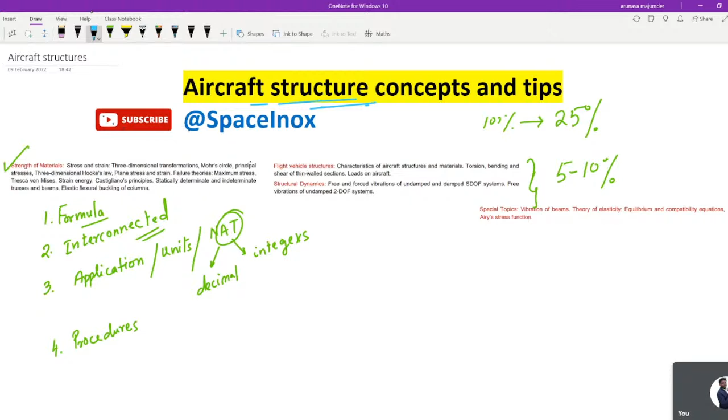There are certain rules and regulations for solving certain things, so if you know the procedure, it's going to be easy for you to solve. It's definitely one of the very scoring subjects, and you can avoid some negative marks because of this. Remember, when it comes to the GATE exam, the questions are obviously going to be complicated, so without wasting much time, let's focus on the particular topic.

As I've said, strength of material is one of the very, very important things. Now, what are the possible questions and how you can plan your study for your last moment preparations? What are the important topics you can't miss at all? So first, I'm going to emphasize you can't miss the strength of material topics which we have mentioned.

First and foremost topic, we have stress and strain. So you know the definition, but in this GATE examination, nobody is going to ask you the definition. However, there is a chance of asking the relation: what is the relation between stress and strain? Now I will come to the point of interconnection, how I can interconnect stress and strain. Let's assume I have one cube of material, say copper.

I have one material, copper, and another material of the same shape, let's say mild steel. So technically, if I have two different materials of the same area, area of the copper and area of the mild steel is same, let's assume the volume is also same, but the material is different. And over this material, I'm applying some amount of force.

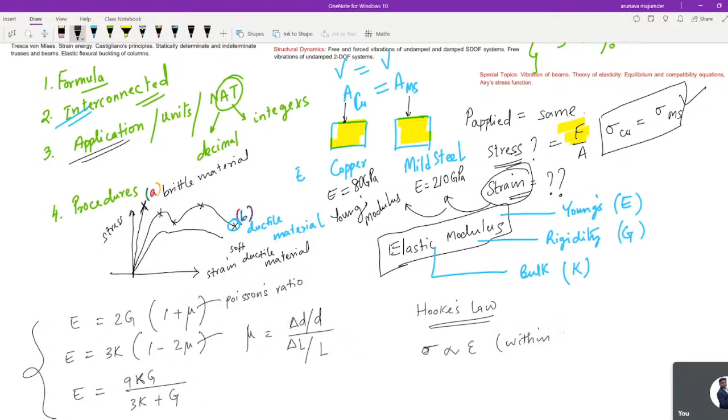Now let's give a brief layout about Hooke's law. What is Hooke's law? If I ask you to write it, it's going to take time, so let me write that. The stress is directly proportional to the strain within the elastic limit. This is one of the very important things. So there is another way to write it: sigma equals capital E into epsilon, which defines the strain, right?

Or else we can write P by A equals E times change in length by L. Now, same thing, if I have to find the change in length, how can I write this? PL by EA.

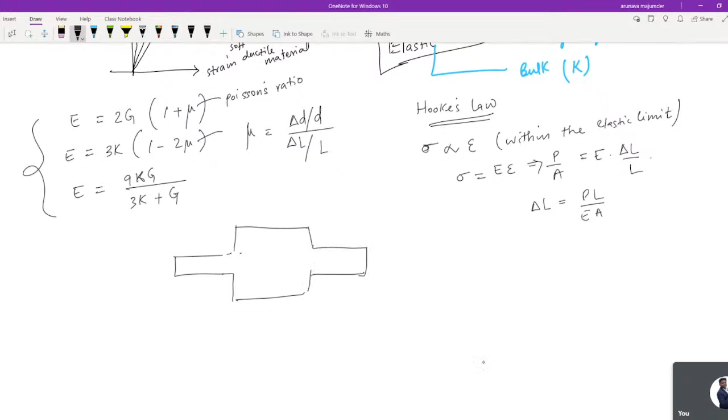Now, if there is a problem, there may be this kind of problem: you have three different sections, one section, continuation of another section, and then again another section. All this A1, A2, and A3, having different lengths. All are having different lengths. Now, how can you find out the elongation? Let's consider there is one force, some P is acting, a tensile force is acting. How are you going to find the elongation of this particular structure?

This is again one of the very common questions, so please do not skip this type of problem. Please do practice it, right? This is a very rapid type of question. Only if P is constant, put the P here. Simplified version: put L1 by A1, E1. If the material is same, then the problem is solved. If they're different, use different nomenclatures. Just follow this simple formula: L3, A3, E3. It's all based on the procedure, as I've mentioned here. So these are the simplified procedures, how it follows from a single step to the next level.

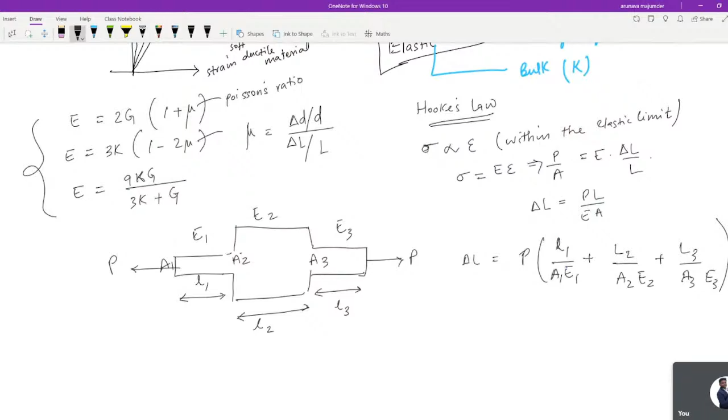Follow that, okay. So as some of you have asked, we are coming to this point, but on top of that, let me clarify each and everything, how this plays out and what are the fine things that people miss out. Each of this holds a very scoring part on your GATE exam when it comes to the GATE exam point of view, right? So I hope I have made it clear till this area. What are the areas we have covered? So here we have still not come to Hooke's law. We are coming to that as well.

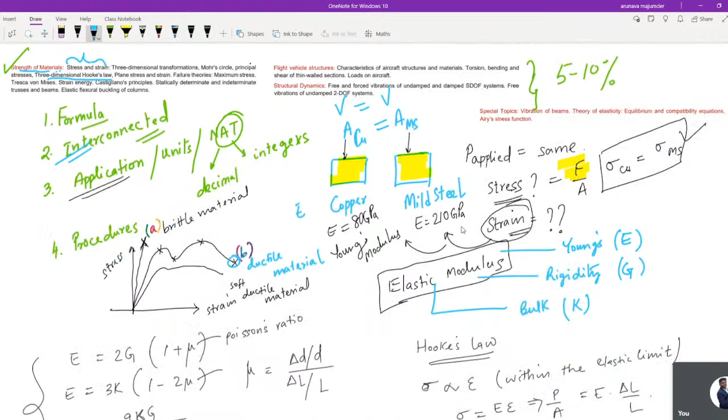Now, so this is a rough idea I have given you about this stress-strain. You have to plan for different materials, okay, and there may be a possibility like kind of. I will give you another example.

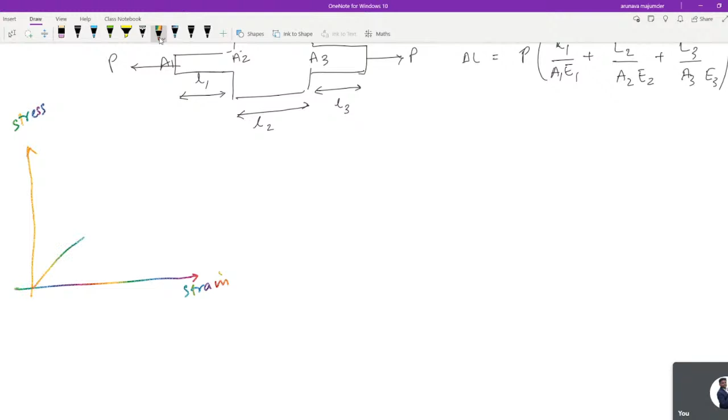There is a graph, okay. Here we have a stress, here we have a strain. We have different kinds of shapes like this, then this one, then maybe like this, and they might ask you to characterize the property, like which is going to be the most ductile, which is going to be the soft ductile, which is maybe the brittle, which is going to be the most stiffest material. So that also you have to be clear with that.

Now additionally, this is one side of a mechanical based question, they mostly don't ask to aerospace, but still I would like to highlight how we can, if they have given you some graphical representation, and if they ask you to find out the Young's modulus, how you can find it from the graph. So remember, within the elastic limit, if you find the slope of the curve, that means change in your stress with the change in strain. This is your strain. If you solve this, you will get your Young's modulus. There may be a small type of question that can come, and may not come as well. So this is another important point.

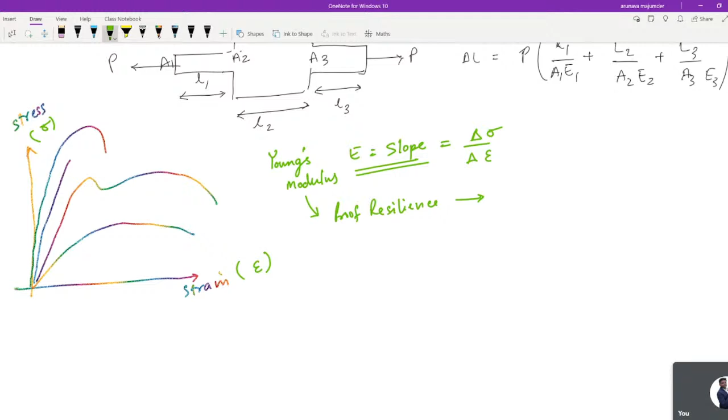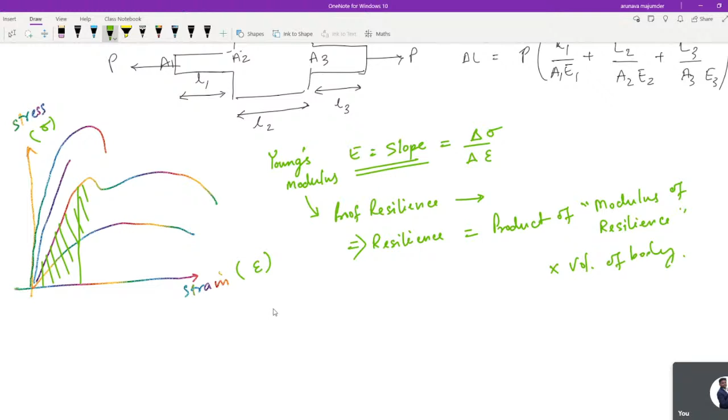Now, relevant to this, there is another important point that comes to my mind: proof resilience, which is a connecting topic with this particular thing. Proof resilience is the maximum strain energy stored in a body within the elastic limit. So how do you find it? If you find the area of this particular region, and multiply it with the modulus of resilience. So if you want, I'm writing this: resilience is the product of modulus of resilience into volume of body. So if you calculate that, you will get this thing. These are more deep into the topic, so you just plan and study accordingly.

Now moving to the next important topic. Definitely again you will get maximum 4 marks from this particular topic, and every year they're asking definitely 4 marks will be coming from this topic, that is transformation and Mohr circle principal stress. This is again a very, very important topic. So here what you have to do is you have to remember the formula, as simple as that. You just remember the formula. Now here I will explain a bit about this thing.

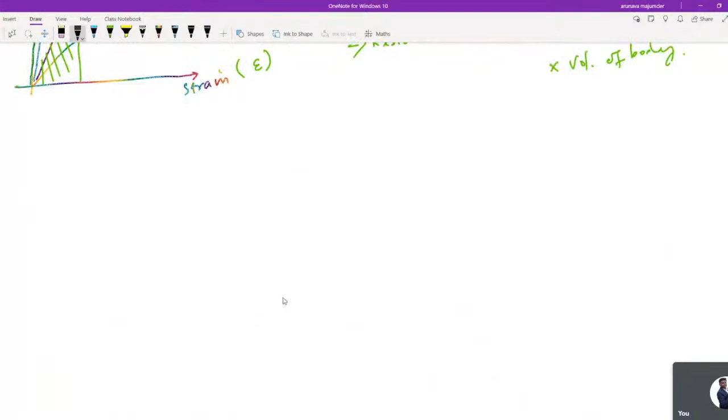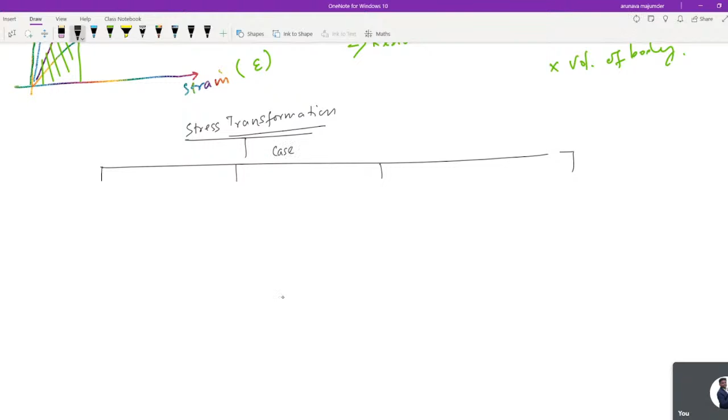When we talk about stress transformation, basically these are classified into 4 cases: case 1, case 2, case 3, and case 4. If you can memorize the formula, well and good. If not, understand only case 2, and the rest will fall into place. Otherwise, remember case 2 alone carefully, and how case 2 connects with case 1, case 3, and case 4. Now, what are these case 1, case 2, case 3, and case 4?

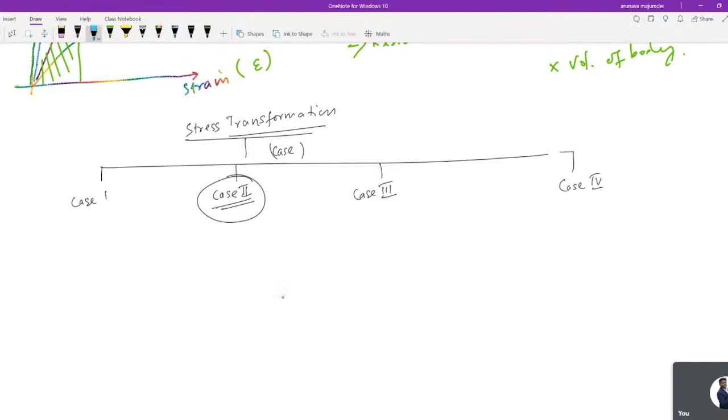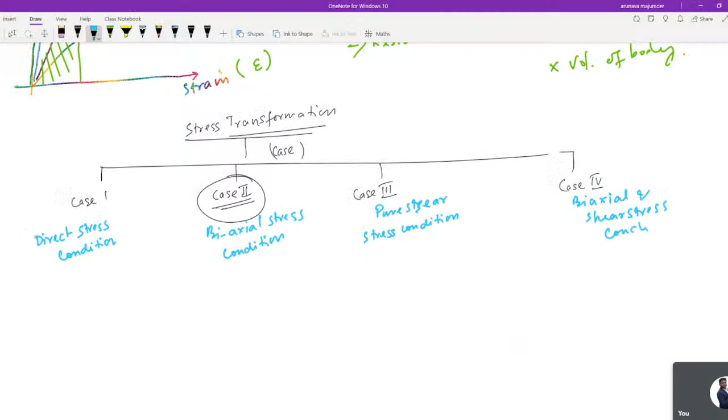Case 1 is direct stress condition. Case 2 is biaxial stress condition. I have only classified a simplified version, because when they ask the question they will specify whether it's a direct stress condition, a biaxial stress condition, a pure stress or pure shear stress condition, or a biaxial and shear stress condition. This is one of the very important among all, and this is the second most important. So most of the time either they ask the biaxial stress condition or the pure shear stress condition.

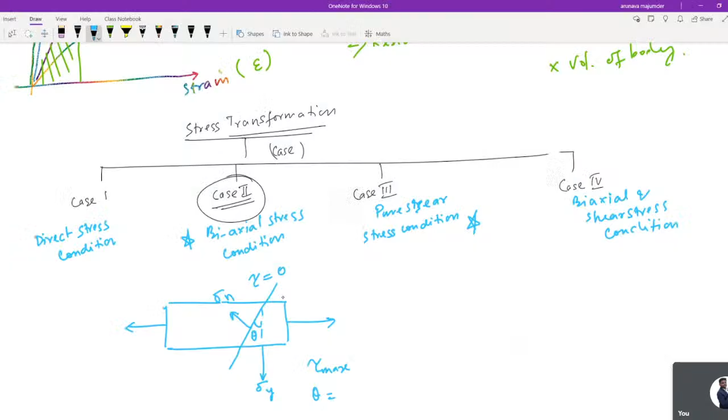So what you have to keep in mind is that if there is any plane, and in that particular plane if the load is acting like tensile forces, there is a cube, let's assume there is one box, and a tensile load is acting on it. Now at some point you are going to cut down into the principal plane. What is a principal plane? The plane at which there is no shear stress, meaning mathematically tau is going to be zero. Now on that plane, how are these normal stresses acting? There will be different stresses acting from these planes, sigma n, then sigma y. So at what angle is it going to be zero, and what should be the angle, that's our main objective to find out. So what should be tau max, what should be the angle, and what should be our principal or normal stress — each of these has a huge derivation.

So here we're not going for the derivation, just the formula. How you're going to connect this formula into these four different conditions, you have to keep that in mind. There is a general formula you might have remembered: half sigma x plus sigma y, plus half sigma x minus sigma y cos 2 theta, plus tau sine 2 theta — this is the general equation. To find tau max, the formula is half sigma x minus sigma y sine 2 theta minus tau xy cos 2 theta.

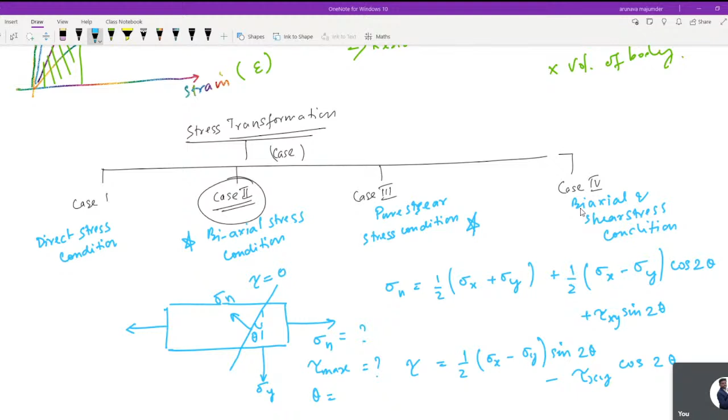So as we are discussing, this is one of the very important formulas to remember. Definitely one problem will come from this by using this formula. So I will suggest you remember this formula.

And there may be another possible way to determine the plane having maximum or minimum direct stresses. So if they ask you to find the theta value, this is the formula to find it. Don't go by the nomenclature, as these nomenclatures might vary from textbook to textbook. Basically understand the facts of what is happening across this.

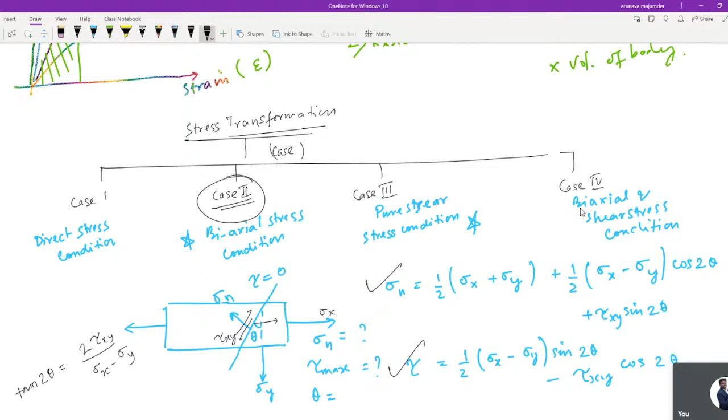So we need to split up all those forces together and find it out. Now, similar to that, using this principle, you have to find the maximum principal stress and minimum principal stress.

Now there are two ways they possibly ask this question. One is maybe some schematic diagram using the Mohr circle, or they might give you certain parameters and you find out the answer. So what is the formula for maximum principal stress and minimum principal stress?

So maximum is sigma 1, minimum is sigma 2. The formula is half sigma x plus sigma y, plus or minus half root over of sigma x minus sigma y whole square plus 4 tau xy square. Okay, this is a basic formula.

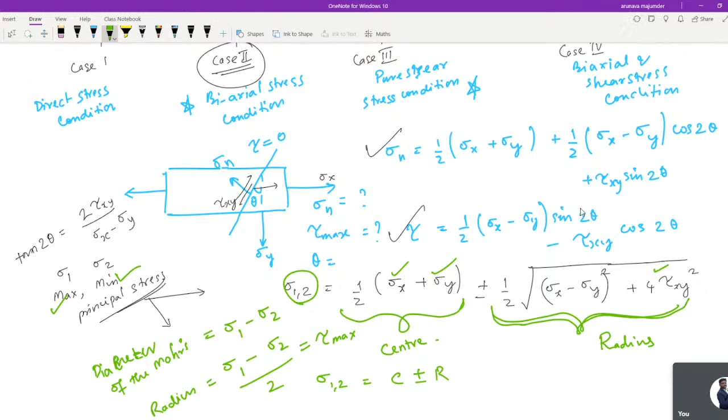So there are certain formulas here. This formula, I'm quite sure, is going to help you out in solving the problem. And as I've said, in this particular topic, they will give you numericals - they will give you numericals. So these formulas are really, really going to help you solve your problem. I hope simultaneously you're noting down or taking screenshots of these things.

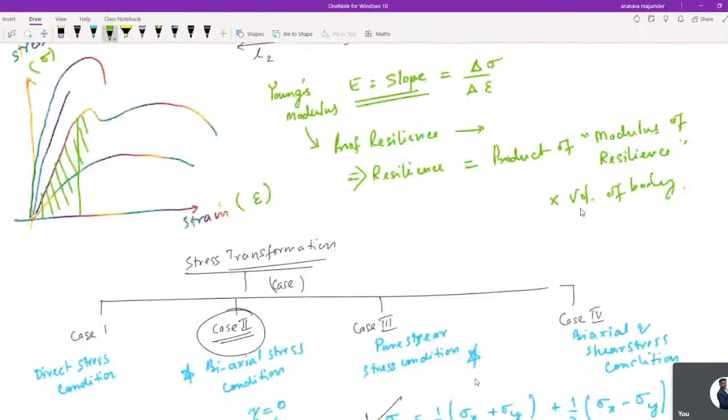Now we will move to another core important topic - each and every topic is very much important. In addition, there may be questions based on this particular theorem. They might ask you something highlighting at what case the shear stress is going to be maximum for the Mohr circle, and what will be the angle. Obviously, if theta is 45 degrees, it's going to be tau max. So such small things you can numerically find out even from here using this particular concept.

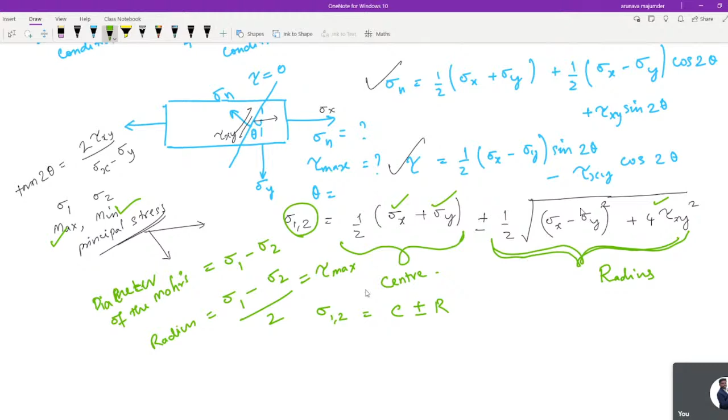Now moving to this important, another important phase - Hooke's law and the plane stress and plane strain.

Now these are again a connecting topic, the three-dimensional Hooke's law and plane stress and plane strain. So talking about this three dimension of Hooke's law, as you know, Hooke's law is that sigma, that is stress, is directly proportional with the strain.

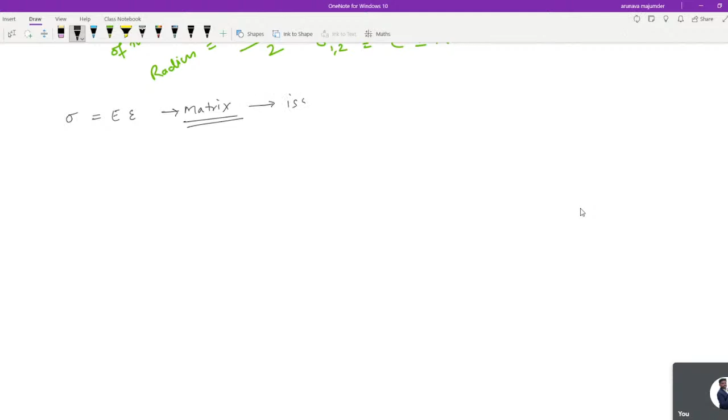So we frame this into coordinates, meaning we transform it into the matrix form. We can solve this in a matrix format. So how do we form this matrix? We consider any body which is an isotropic body.

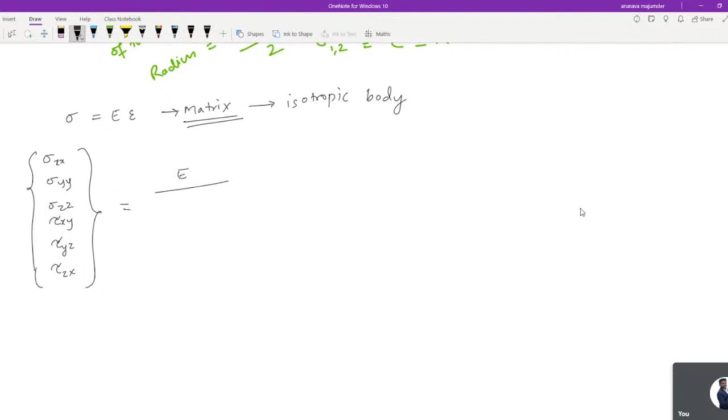So we can write this as sigma xx, sigma yy, sigma zz, tau xy, tau yz, and tau zx, which is going to equal Young's modulus over 1 plus mu into 1 minus 2 mu. Obviously there is a huge derivation, so nobody is going to remember the derivation here. The only thing useful here is the formula.

This is going to form around a 6 cross 6 matrix. Here also mu, here also mu, 0, 0, 0. Here you will have 1 minus mu, mu, 0, 0, 0. Here you will have mu, 1 minus mu, 0, 0, and the rest 0, 0, 0, 0, 0, 0. Here we have 1 minus 2 mu by 2, 0, 0, 0, and again 1 minus 2 mu by 2. So this is one kind of derivational thing.

But again, I'm telling you, you don't need the derivation, but you need to remember this equation. If you follow the last 2 years' question papers, they have rapidly asked a lot of numericals from this particular equation. They will give you some terms and conditions, and some of the parameters you need to consider as zero. What are the terms and conditions? Whether it's the plane stress condition or the plane strain condition. Based on these two conditions, you have to substitute some of the parameters as zero.

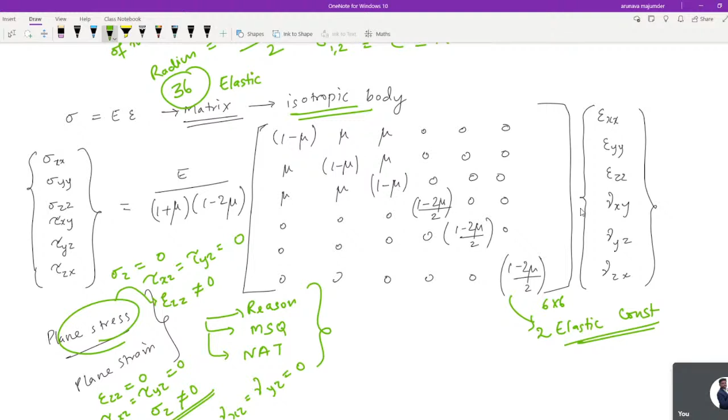Then next comes whether it's a uniaxial stress or a biaxial stress, how they act. This particular topic is quite related with another topic, and there are some numericals on that using compatibility—we call it the equation of compatibility. Definitely this is again another important question.

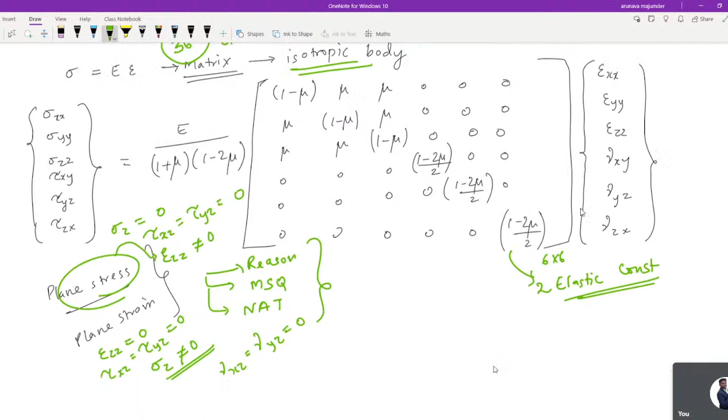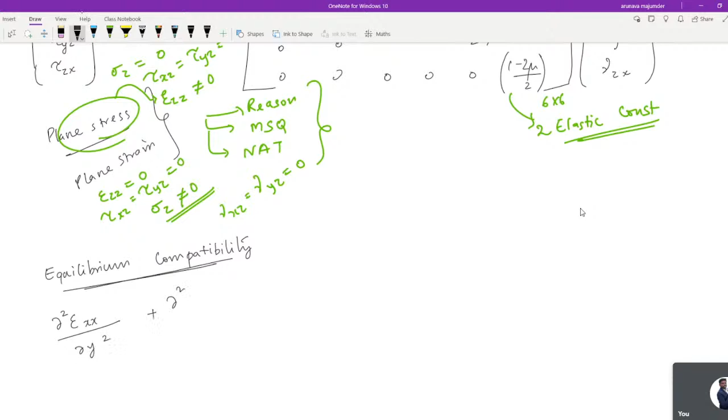So I will write down the equation here, which is called the equilibrium compatibility equation. There's a formula: d² epsilon xx by d y² plus d² epsilon yy by d x² equals d² (gamma) xy by d x d y. Definitely there will be one question from this.

Remember the equilibrium of compatibility, or we can say sometimes conditions of compatibility. This is again, I'm telling you, one of the important questions. And similarly to this, then Airy stress functions and how this plane stress and plane strain are connected, right?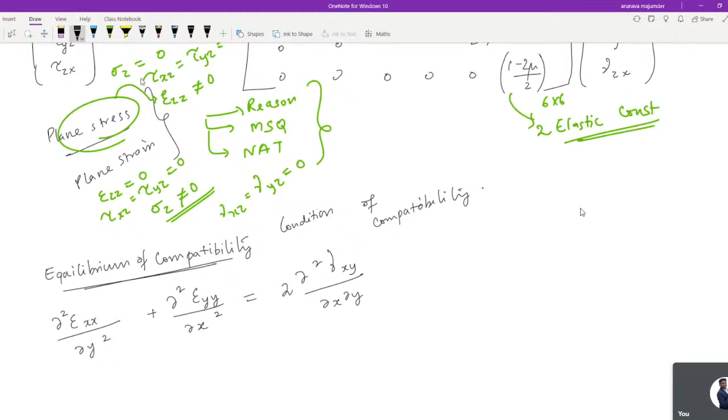Now, coming to failure theory. Failure theory is just again quite connected with this principal stress. There are basically five important failure theories. Among the five failure theories, remember their application, what is the application and the formula, what is the name of the scientist, what are the constraints. Remember that, that will only serve the purpose for this particular topic. So these are very rare questions for failure theory. Hardly they ask, hardly. Maybe 1 mark we will get it.

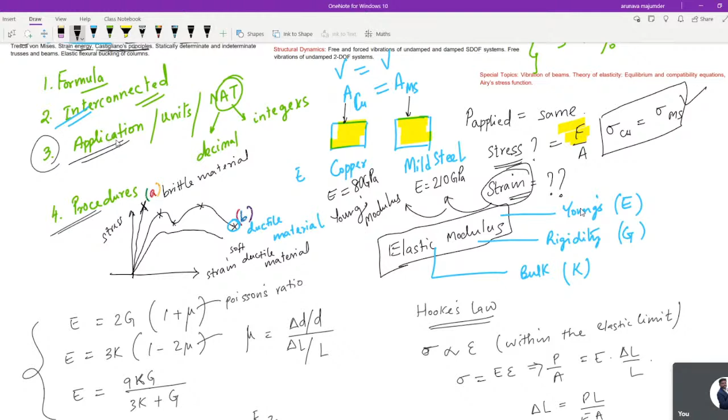Then talking about strain energy, yes, the strain energy and to solve the problem using strain energy. Now what happens? You have to remember the Castigliano principle and Castigliano method. So for knowing this Castigliano principle and method, you will get frames or truss problems. So how the strain energy and what is the formula for the Castigliano theorem, how to solve a single problem, what are the shortcuts, whether they have given the beam, whether they have given the frame, whether they have given the truss - accordingly how you're going to use the Castigliano principle. That procedure, it's a very vast topic, you have to remember this thing.

And there is a chance of having one problem from Castigliano theorem or the bending, Castigliano or the statically determinate or indeterminate problems like beams, structures, trusses. Definitely, one problem will come from the truss connected with the column. Like they will give you one truss problem. Definitely, the truss problem is quite common in all the GATE Aerospace question papers. Truss is one thing they are asking every time. So what kind of questions might they ask in the truss?

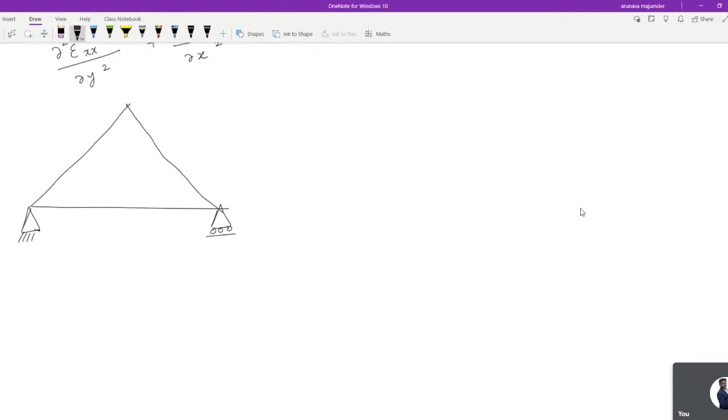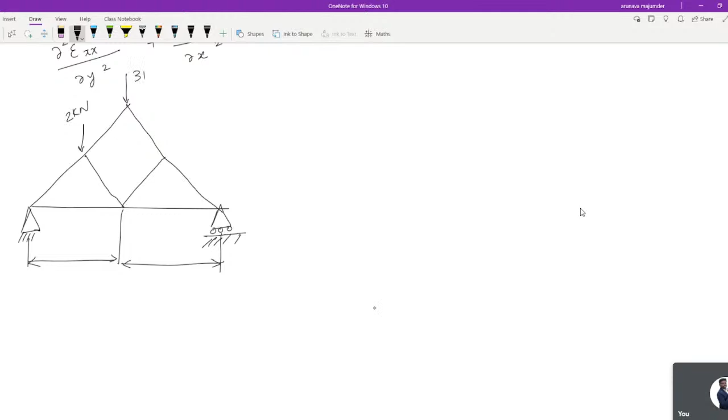They will give you some kind of structure, maybe with different types of loads. You have to understand what type of loads they have provided, where the loads are acting, whether they are acting like this or this, what are the dimensions they have provided. Now suppose they have given one structure like this, and given 2 kilonewton, then here 3 kilonewton, here 5 kilonewton at this point. They have given some angle, this 30 degrees, this 60 degrees. Some other parameters, maybe 4 centimeters, this is 8 centimeters - some random things I'm writing here.

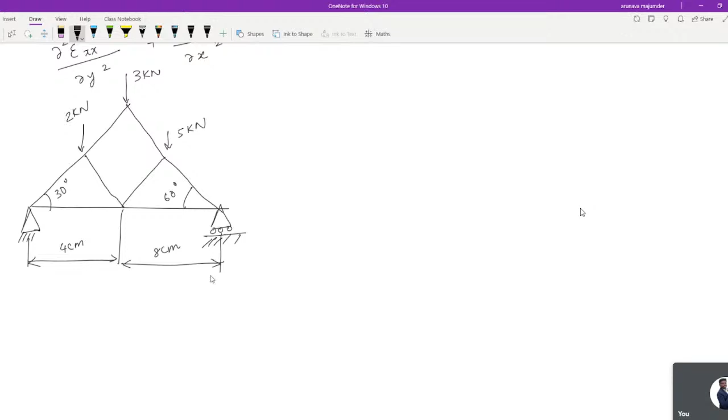And they might ask you which point will lead to buckle first. So first you have to use the critical load formula, using Euler's principle, which is pi square EI by L square.

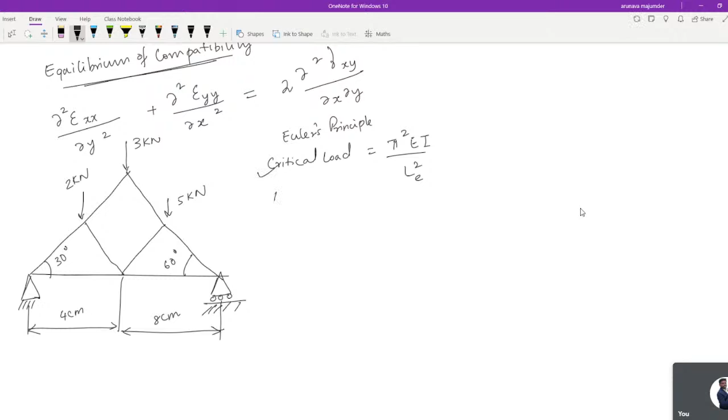So there are four important end conditions: both ends fixed, one end fixed one end free, both ends hinged, one end fixed one end hinged. Based on the four end conditions, this formula is going to modify. First you have to find out the critical load acting on this particular structure, so wherever you have the least value, that is going to buckle first. You have to identify maybe the structure, maybe the amount of load, or some other things. So this is a combination of truss and column problem.

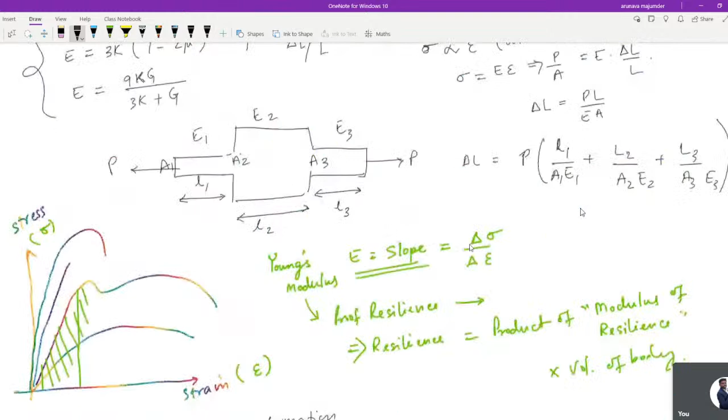Which also comes under the statically determinate, indeterminate structures. When we talk about statically determinate, indeterminate, we have fixed beam, propped cantilever beam - what will be their shear force diagram, which is the correct one for that particular figure. Shear force diagram, then bending moment diagram, what will be their slopes, what will be their deflections - all those things. For this, again, you have to remember the bending equation and other things.

The bending equation is again another important one, which is M by I equals sigma by y equals E by R. So how are these parameters interconnected? Maybe some questions from neutral axis, some questions from centroid - how their CG, how will you calculate the centroid?

Maybe they have given you some small sections, they will ask you to find out the centroid for that particular section. There may be a question on this.

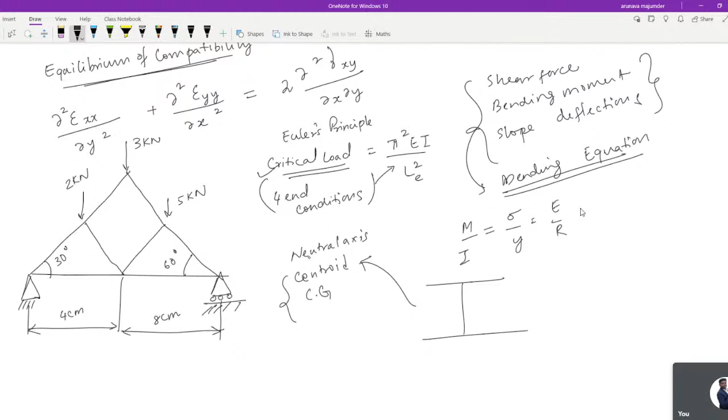And talking about centroid, yes, upcoming there is another topic: torsion, bending, shear flow in thin wall structures. This is again a very, very important topic - the torsion, bending, and shear flow.

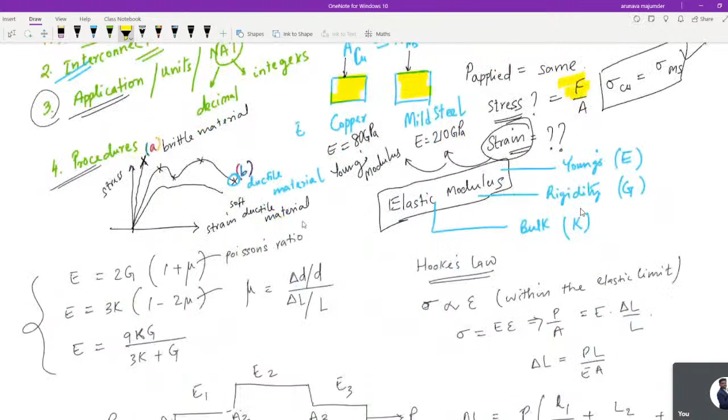So you have to find out your torsion equations, how the torsion equations are connected with one another. And if it is a multi-cell structure, and there is a torque occurring...

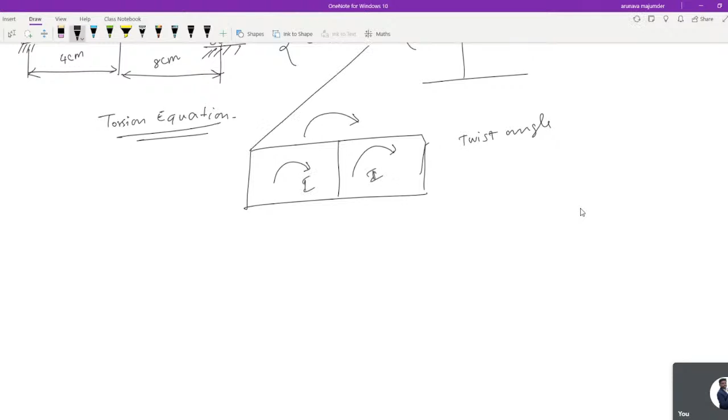The twist angle for cell 1 and cell 2 is going to be the same. And if the length of the beam is the same, we can consider beta equals to angle of twist per unit length. So beta of cell 1 is going to be the same as beta of cell 2.

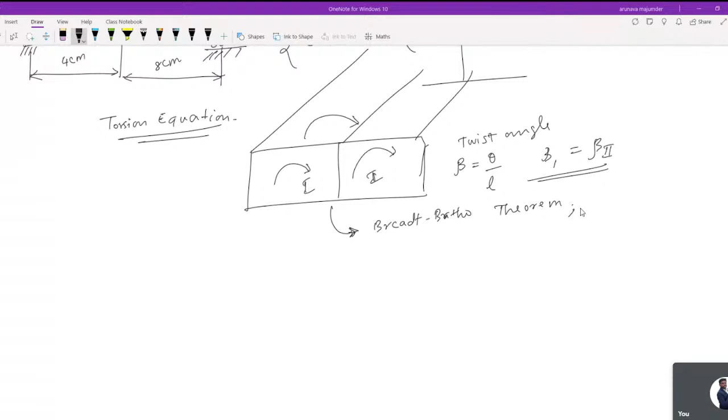So there are some numericals where you have to use the Bredt-Batho theorem. Please don't skip this particular problem. At the end of the video I will drop those things in the description box, how you can solve it. There are some numericals which I've already solved using the Bredt-Batho theorem. Please do practice at least one problem.

Last year the problems they asked were quite lengthy. We cannot directly say the paper is going to be lengthy or not, so please plan your things accordingly. This is one of the very important topics. Definitely the questions from this particular topic, 2 to 4 marks will be coming from this topic, or at least related to the Bredt-Batho theorem.

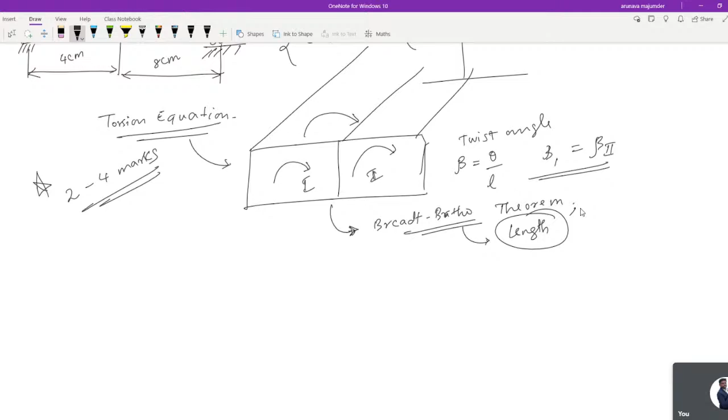The concept here is the twist angle is going to be the same because it's rigid. It's going to be the same. And this is, they have used a principle using torsion equation to solve that problem. So this is again another important topic over here.

Then rarely based, simplified 1 or 2 marks - these are rarest of rare things. Characteristics of aircraft structures, maybe from monocoque, semi-monocoque structures, loads acting on the aircraft like air load, gust load, and how they're connected with one another. These are rarest of rare questions, theoretical based.

Now another part - vibration. This part already we have discussed. Airy's stress function, this thing we have discussed. Yes, coming to this point, vibration. This is again important, coming to the end of our structures too.

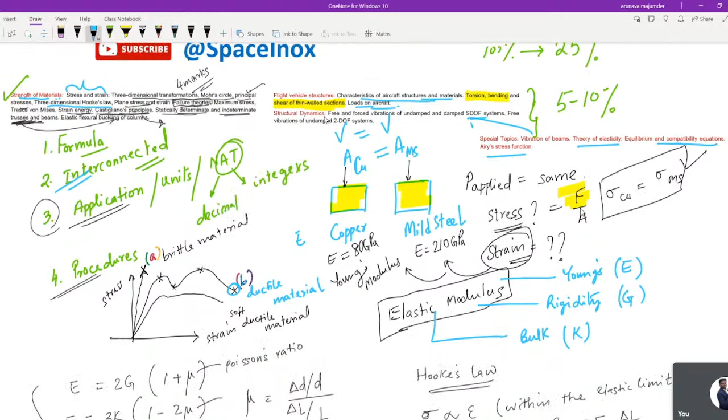Talking about the major questions that arrive from here. Okay, now let me share one more equation with you guys. Just talking about the elasticity, I hope that is going to be helpful for your future use - this two-dimensional compatibility relation.

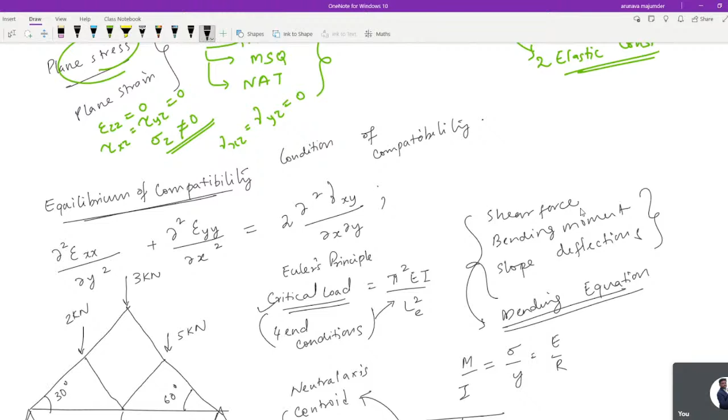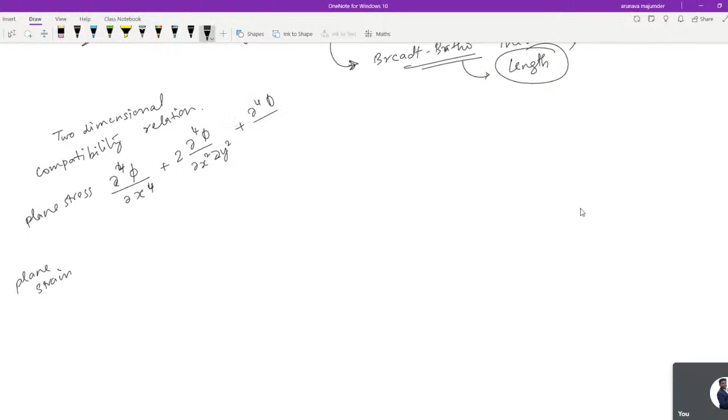Two-dimensional compatibility relation. So one is for your plane stress and one for plane strain. For plane stress, it is dou power 4 phi by dou x power 4 plus 2 dou power 4 phi by dou x square dou y square plus dou power 4 phi by dou y power 4 equals to 0.

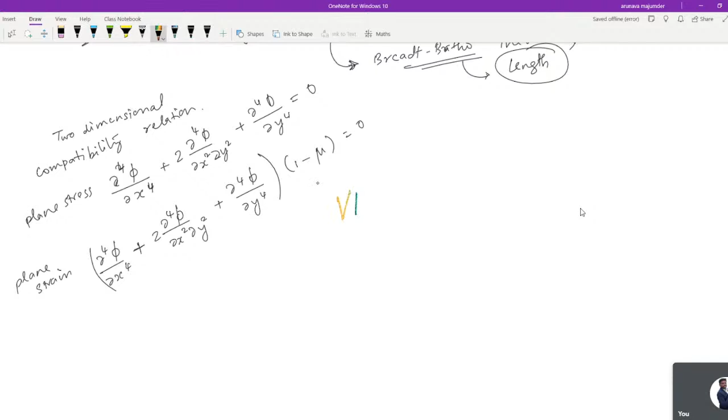Now coming back to vibration - this is definitely another very scoring part. Again you will get 4 to 6 marks especially on this topic, so you can understand out of all those things. Especially from this topic you will get 4 to 6 marks, including 1 mark questions, including some multiple selection based questions, including some numericals - definitely 2 to 3 numericals will be there.

Now let's first understand the strategy - what type of questions. One is theoretical, based on concepts: what is meant by displacement, velocity, acceleration, how you denote them, how the damping forces relate with the spring forces, how the spring forces relate with the inertia forces, what are the different parts.

So basically, mathematically, we can denote this like this: M or mx double dot defines your inertia force, kx defines your spring force, and this one defines your damping force. Now, they will give you some of the parameters and you have to find it out - there are two things you can find.

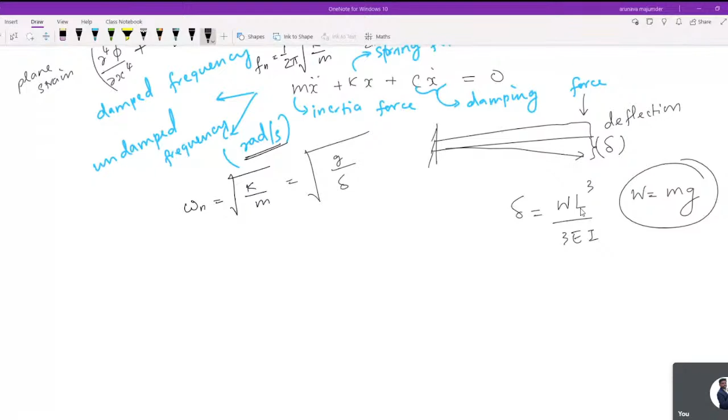There are a lot of tricks, and as I've said, we will talk about the connectivity - how the parameters are interconnected. This is one of the best examples of how, from the deflection problem, we compare with vibrations. This is a very good example, and whoever sets the GATE paper always makes use of this thing.

In the last moment I will not suggest you go for new interconnections or study something new. This is the time to refer to whatever you have studied, just brush it up, practice as much as you can, and read the same topic repeatedly. Don't go with some new topic - this is not the time, because you don't even have 1 week left. So this is the time to brush up the concepts, do as much as you can and practice, because at the end you only have to practice it.

Let's see how we can find the frequency by putting those things over here. The G is already over here, so what type of answer will you get? The omega for this particular scenario is root over of G times 3EI by mg L cube. Let me cancel off this G and G, root over of that, so I will get root over of 3EI by m L cube.

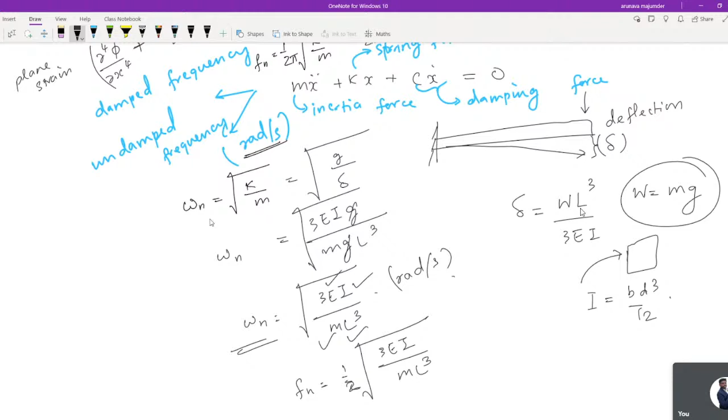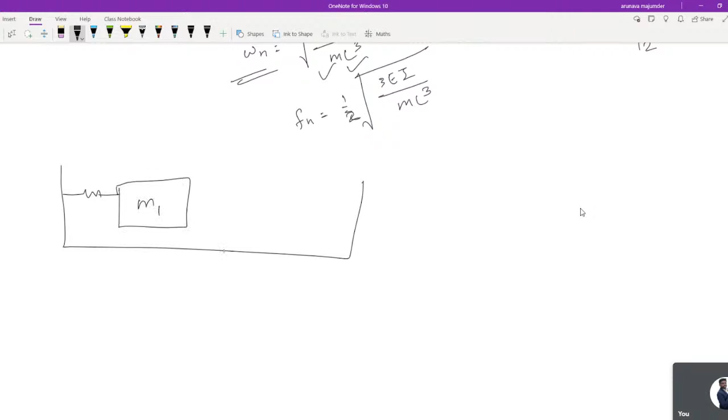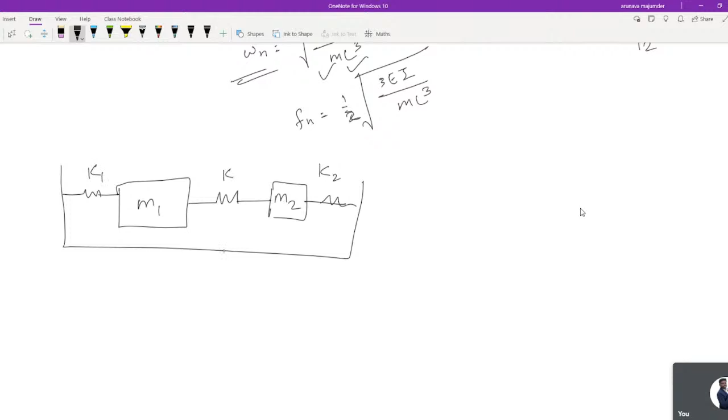Now, likewise, there will be a problem where you have a damped free or undamped system of 2 degrees of freedom. They will give you a structure like this - one mass over here, then another mass is connected, however they want it arranged. There's a different type of springs with different constants, and there will be a roller. So what will be their nodes?

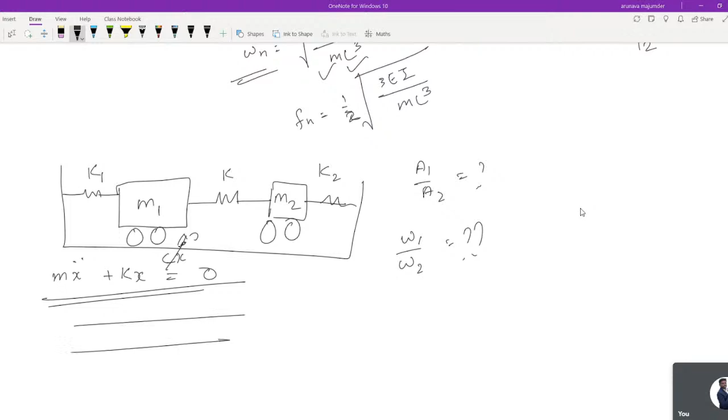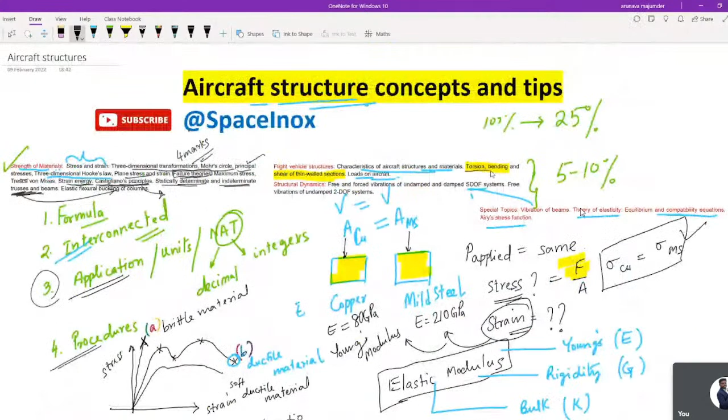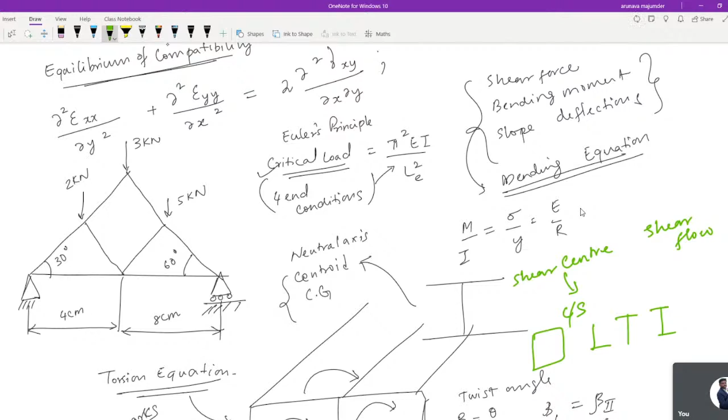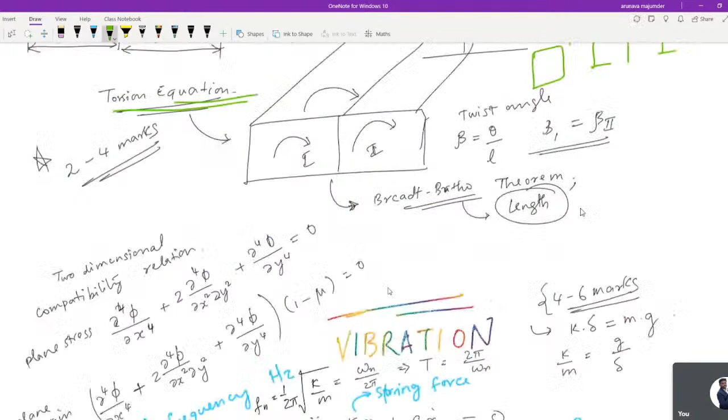At the end of this I will put all the links together. In between, I have skipped one more important topic when we talk about torsion and bending - the shear center, which is one of the important topics: shear center, shear flow, shear center for different cross sections - L, T, I, rectangular, or closed sections, etc. This is another connecting topic, very very important when talking about torsion and bending.

Okay, so I hope I have given you the overview. If you have any particular questions, I'd like to clarify based on the tips, or any additional tips you're looking for, because it's just a 1 hour session. I will love to clarify if you have certain things regarding gate or some basic things from my end. So I'll be looking forward for your answer.

Till then, I'll be sharing some important formulas which may be useful for your future use. One of them is damping ratio - there may be problems on damping ratio. It is C by Cc, also known as C by 2m omega n, or C by 2 root over of km - K and M. I hope you were clear with that.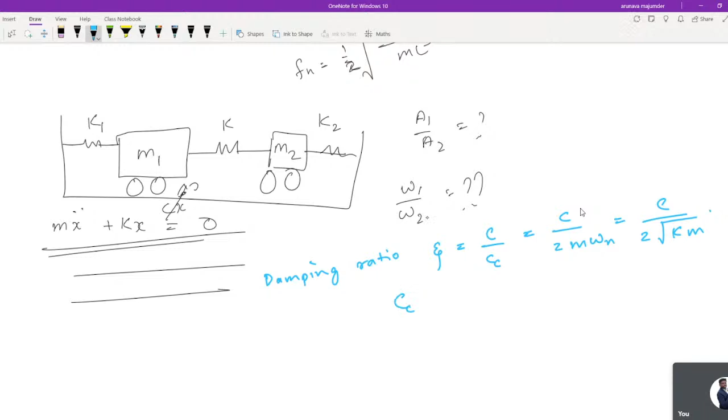And from here we can understand what is critical damping, right? Critical damping is 2 root over of Km. We can also write that.

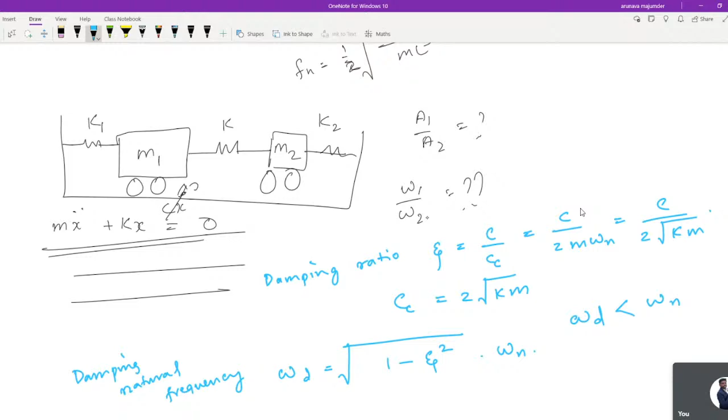Apart from that, there is damping natural frequency, denoted by omega d, which equals root over of 1 minus damping ratio square, into omega n. Keep in mind the damping natural frequency is always going to be less than the natural frequency. As I discussed about the time, this will vary - for natural undamped it goes with t equals to 2 pi by omega n. If they ask about damped time period, you have to write using the damped frequency, as per the required question.

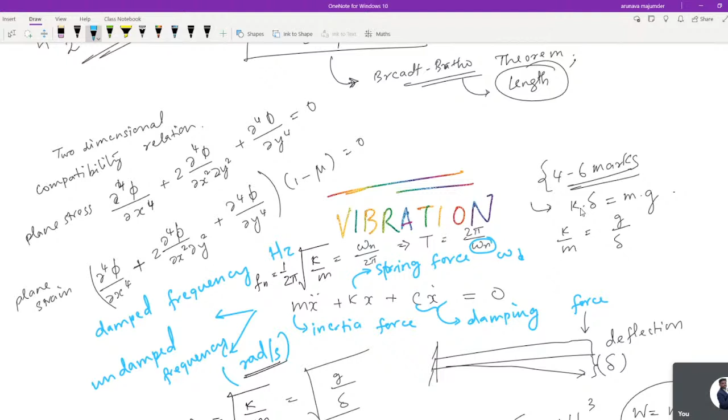Okay, so I would like to know how you felt about the session till now. Whatever I have discussed, do you want me to specify some particular things, any other topic, what things you can study on that particular topic? If I missed something, I'd like to know if there's anything I've skipped that you need as you are preparing for it.

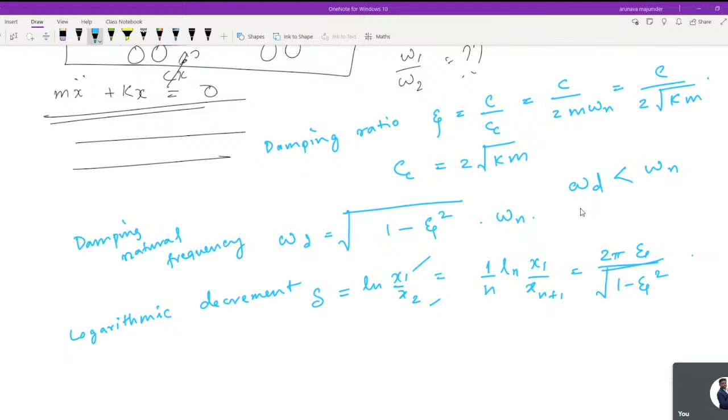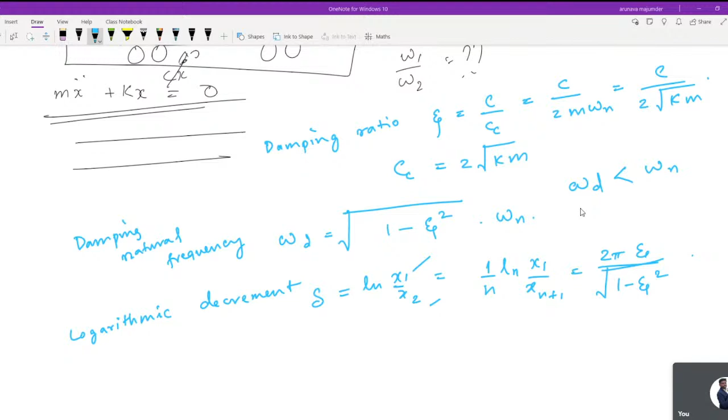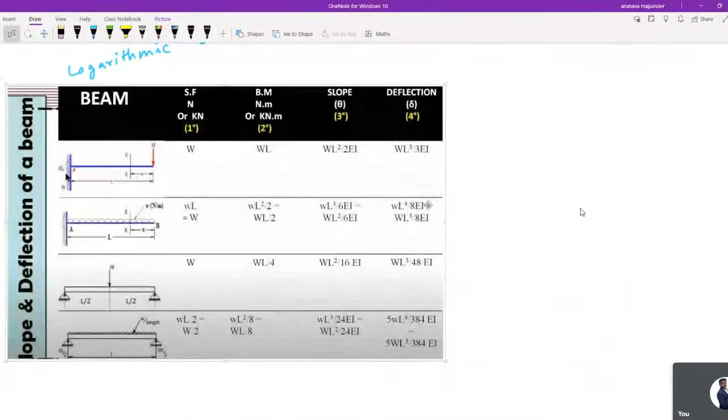So for one more thing, talking about tips and tricks - there are a lot of things like deflection problems. This is one way you can remember the deflection formulas for each and every load and everything - how you can remember these things, how you can remember the formula. So for that, I would like to share.

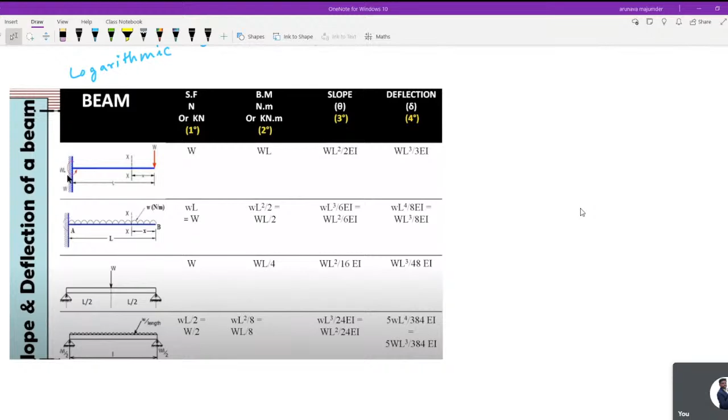So avoid certain things. Let me tell you some of the things students do. If you know the do's and don'ts, don't rush up reading the question. You will feel, okay, I have solved this problem, and you will start it, but at the end, the output is going to be different. So never rush and read it.

Read, be very calm, be very relaxed. Relax and read the question carefully. That is going to be the first and foremost thing. Read the question carefully.

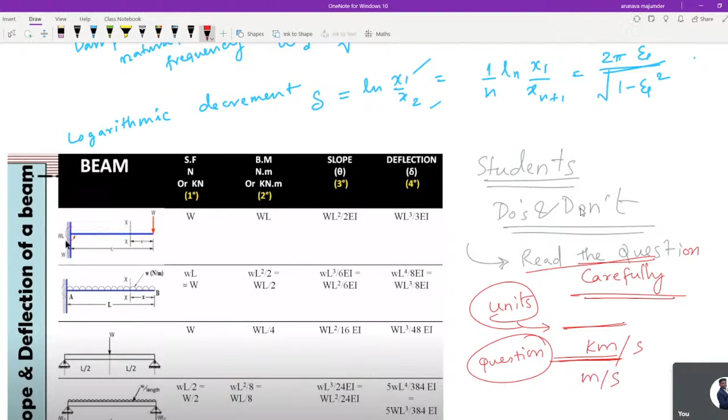This is where students make mistakes. If there are units, try to convert all into the simple unit. Check what unit the question is asking for. Please be careful, because sometimes they ask for an answer in kilometer per second, and you've given meter per second. So though the solution is right, the answer will be marked wrong. Be very careful with your units.

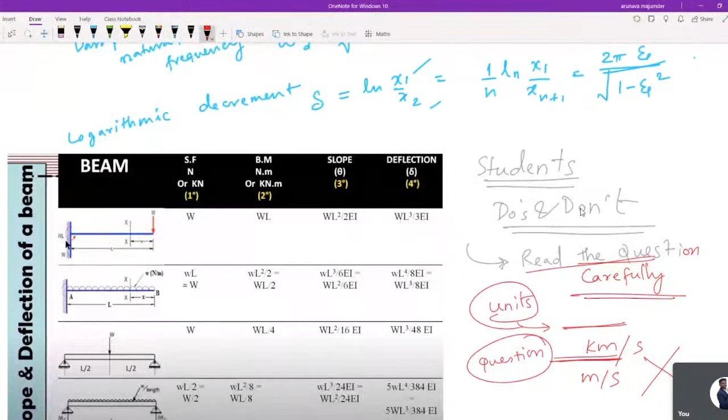A few more things: try to relate with other concepts. Understand how those parameters are connected when you are preparing. Understand what they're asking.

Don't waste time on some question for a longer time. You might think that particular topic is so well prepared, but you're unable to get the question, or keep thinking about it. So stop wasting your time on that. Don't waste time overthinking a particular answer.

Rather, they will provide you scribbling paper. Keep that thing aside and move on. You can review that answer at the end. If you don't answer it, it will be considered not answered. Remember, each time you attempt a question, after clicking save it, do save the answer, then move to the next.

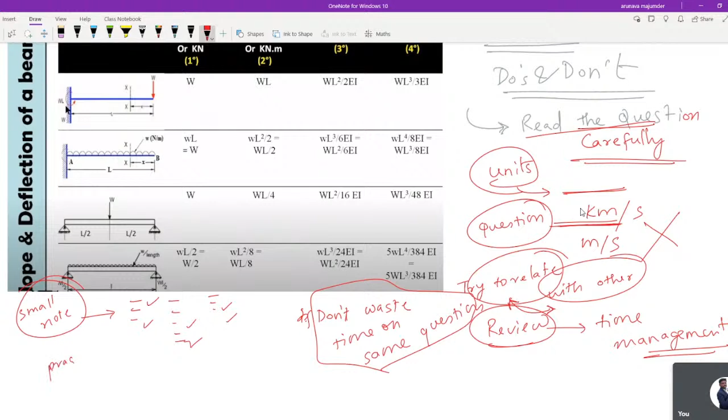Practice as much as you can. Practice and solve papers. That will help you build your confidence, build your ideas, and build your concepts as well. Try to solve as much as you can.

You can take reference from engineering services papers close to these topics. You can take from mechanical, you can take from ISRO papers. There are some exams conducted through them. Go and refer to those things.